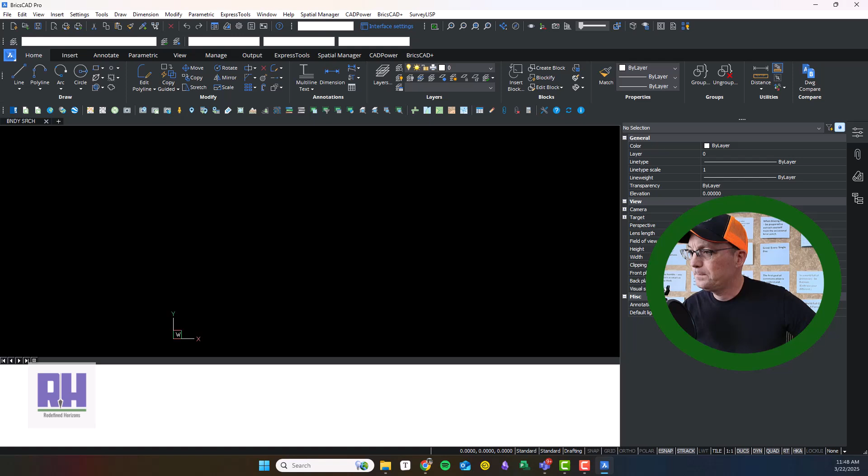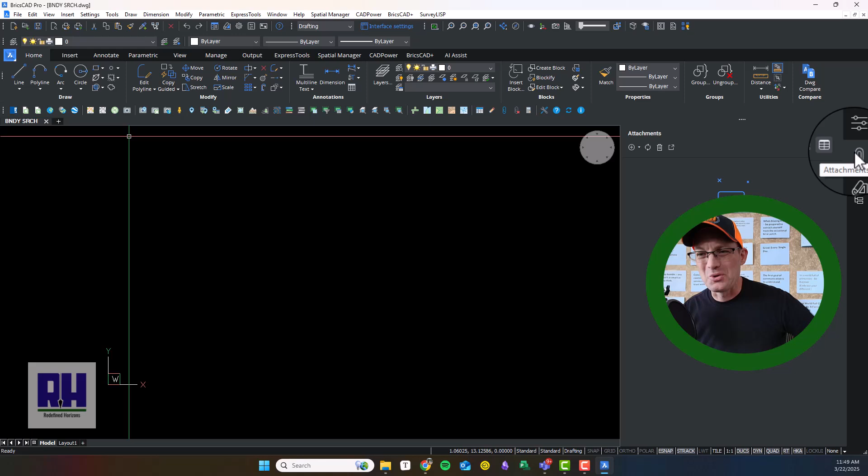I'm going to go ahead and open this drawing up in BricsCAD. The very first thing we're going to do is drop in our points. Okay, so we already have our points. I've imported the points in Carlson into what we call a points drawing. I have other videos on YouTube that show you guys how to do that. So we're gonna insert that drawing as an XREF here. We are on state plane and our boundary is going to be in grid, so we'll have to remember that. So let's go to our job here.

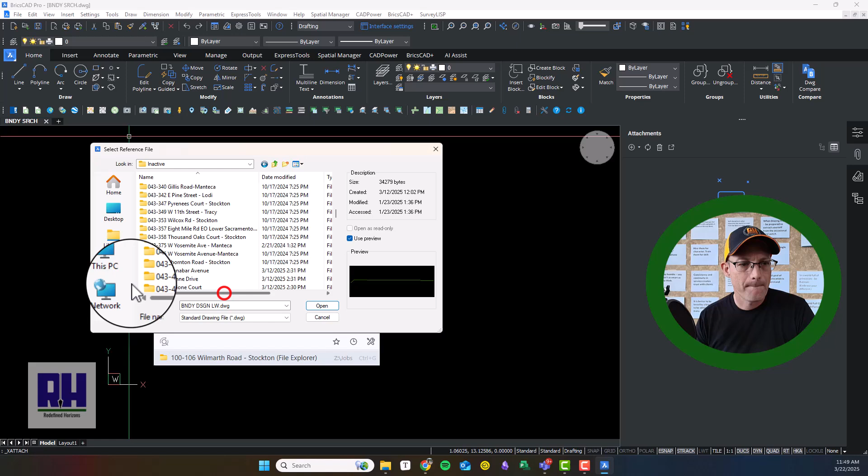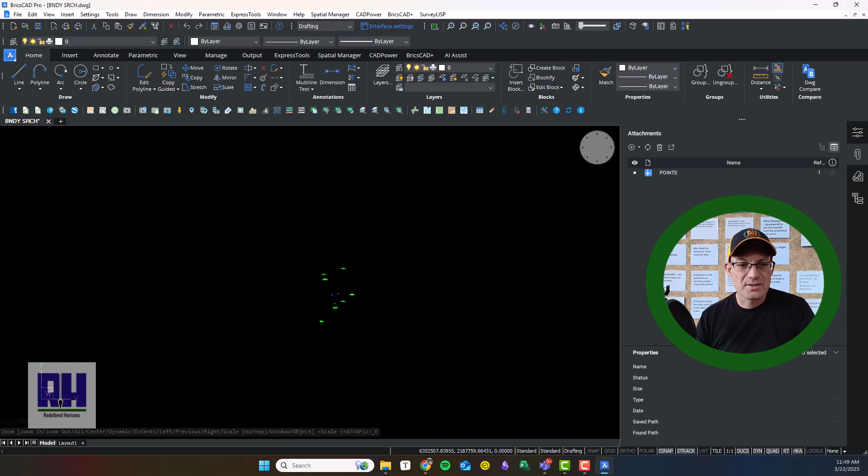This is Wilmarth Road. We keep our points drawing in our Carlson folder. So I'm going to open that and attach it at 0,0, scale factor 1. Okay, so now we've got our points. You see when I zoom out, I get these other points. Those are the CORS stations that I tied out. That's okay, I'll leave those in there for now. All right, so here's our 4 primary control points. And this is just a weird BricsCAD thing, but these are our found monuments.

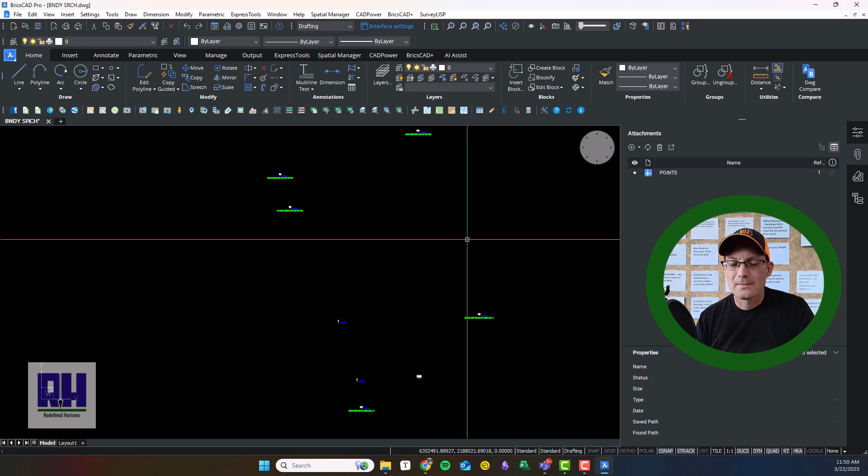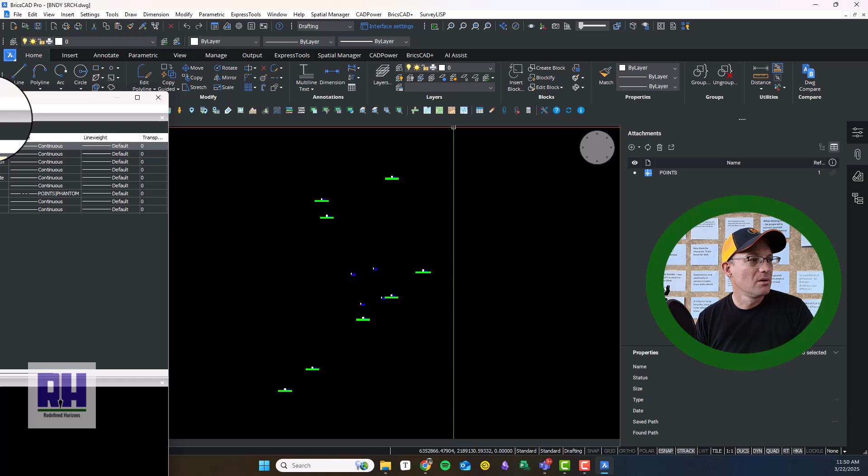It might help to have our GIS pulled up. It might be a little heavy with the screen recorder going and everything. We may need to get the GIS up. We'll see. Because we're going to start dropping some maps in here. I'm going to start with what I think is the most important map. We like to drop those in as blocks. And what I'm going to do is create a layer for each block. So we're going to make a new layer and it's going to be called blocks, plural.

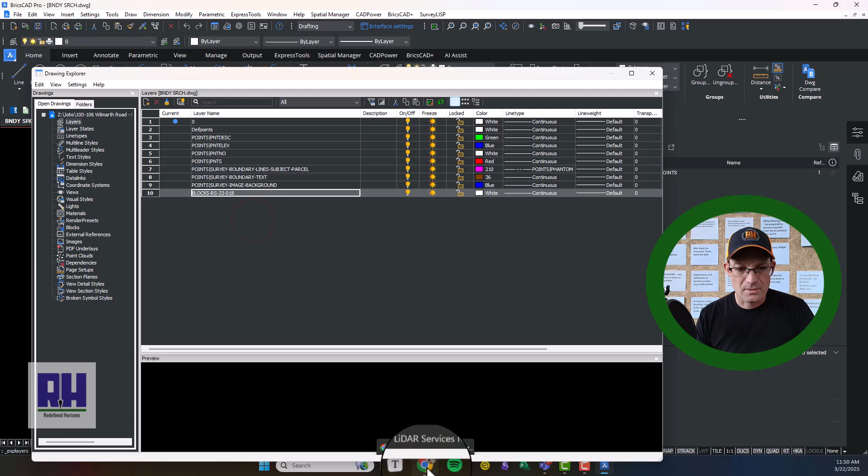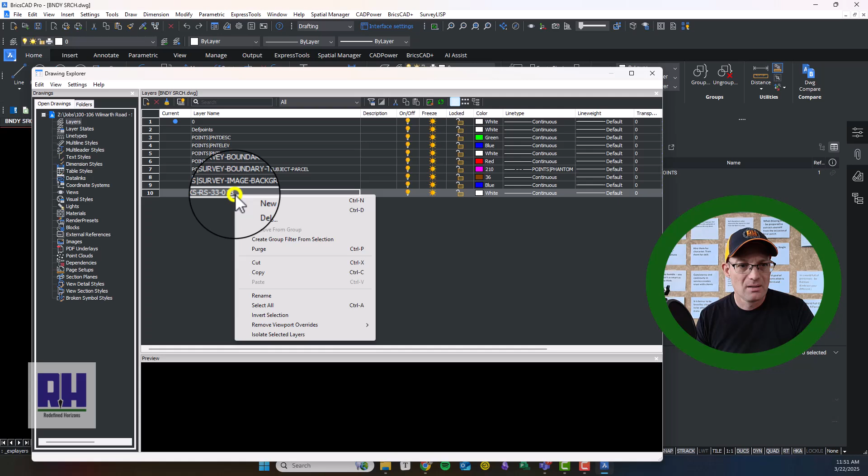This is RS, I think it's 33-018. So let's go look because I don't remember. We want to make sure that we name stuff properly. Oh, I'm in the wrong spot there. I apologize. All right, we got RS 33-016, and we have 32-18. That's our highway map. So let's make that 32, and we'll make a new one. Blocks RS 33-016. That's the most important map.

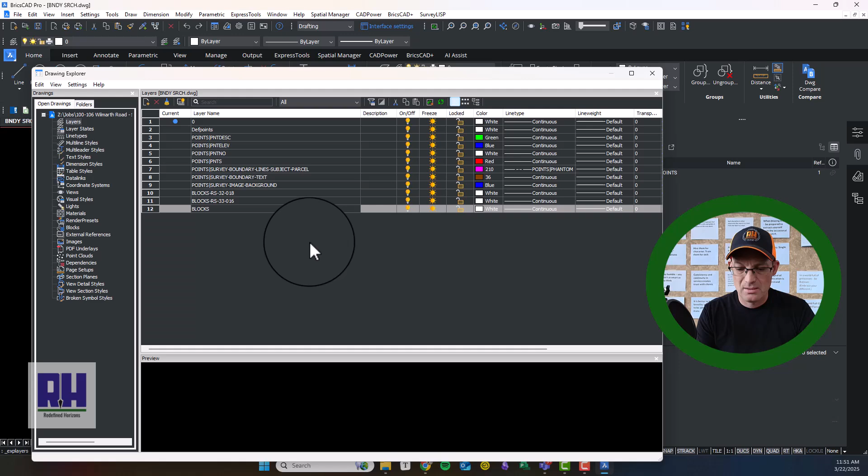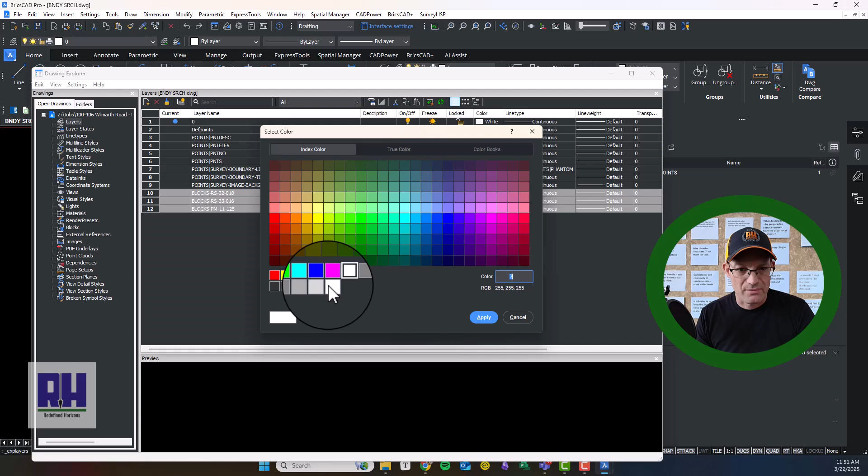And then we've got a parcel map, blocks PM 11125. And then we like to make all those block and XREF layers blue. Okay, so we got our layers. Let's make this layer the current layer. And then we'll insert that map as a block. So we're going to browse for our COGO folder. Make sure I'm in the right spot here. I'm not.

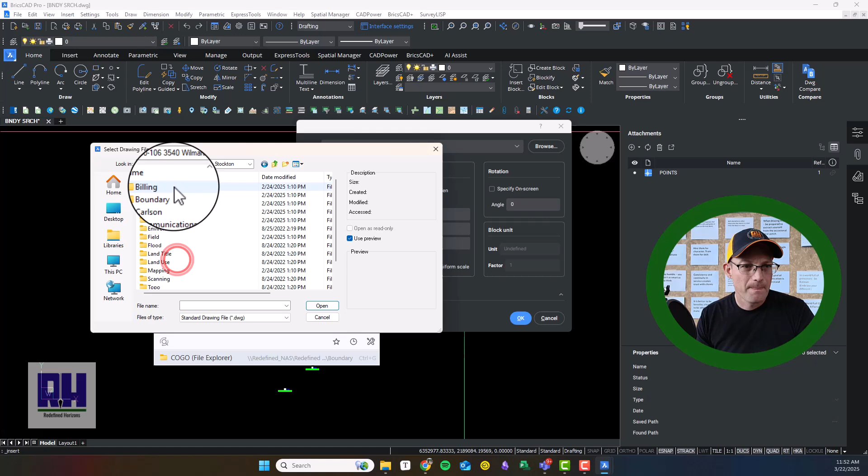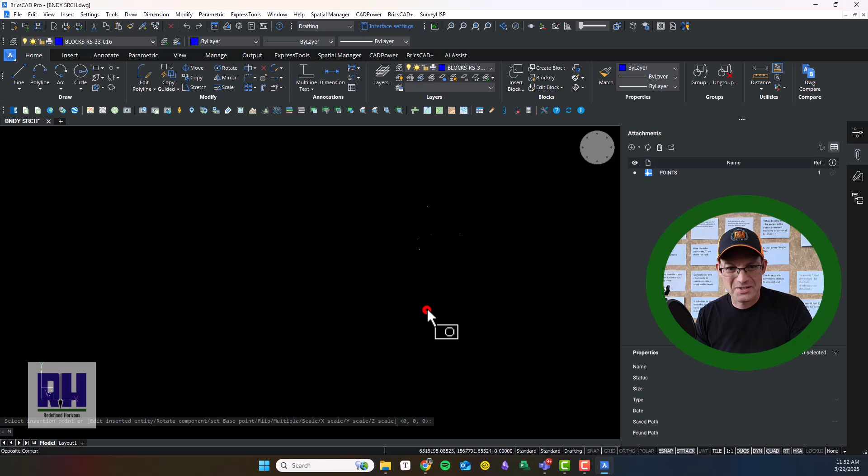And we just do this one map at a time, basically. So we're going to go into our boundary COGO folder. I am going to pick my map, and we're going to insert it. Okay, now sometimes you get this issue where it's off because it got COGOed in state plane. So I'm just gonna try and drop it kind of close there, and then we'll zoom in a little. All right. Okay, now we need to scale this.

Hopefully, yours truly did his job properly and exported a scale factor from the TBC project. Let's see if I did that. So we'll go into our field control, into our TBC project, export. What? Say it ain't so. We got a scale factor. All right, so I'm going to use point number 1 as my main point. So here's my scale factor to get to grid. I'm just going to minimize that for now. And so we're gonna scale this.

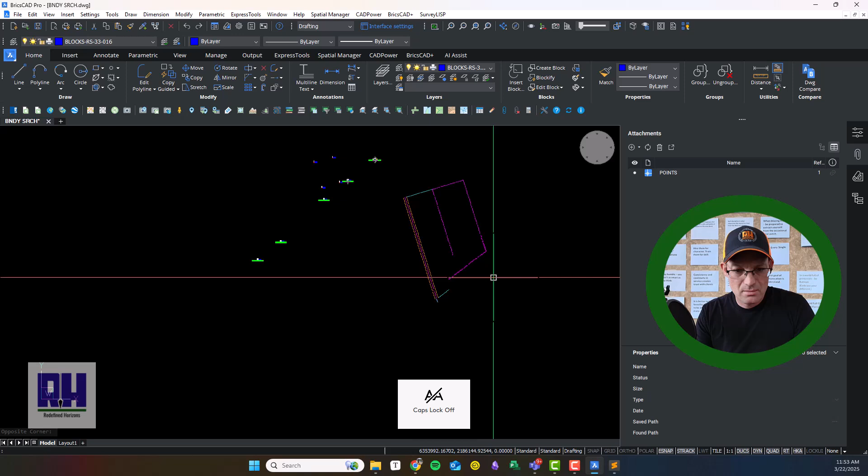We're just going to run the scale command. I'm sorry guys, I'm old school and I'm command line driven. It doesn't matter where we scale from. We're going to put in our reference factor. It didn't let me do that.

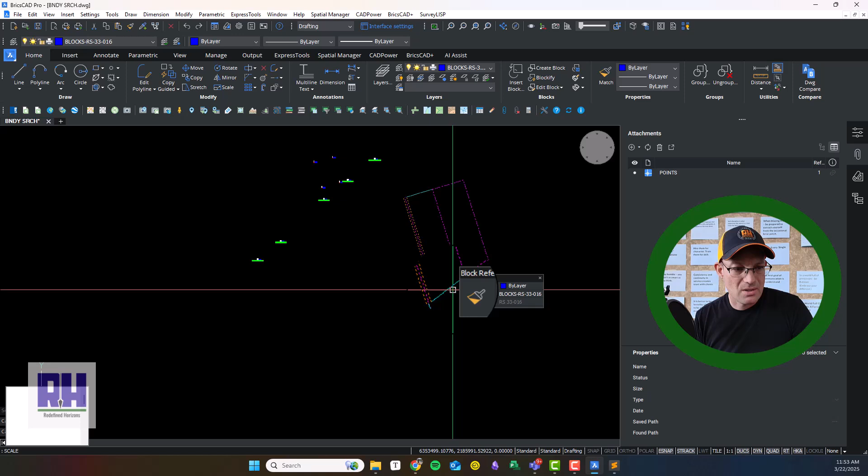Let's try again. Scale point. Will it only let me type it? I guess it only lets me type it. 412741.

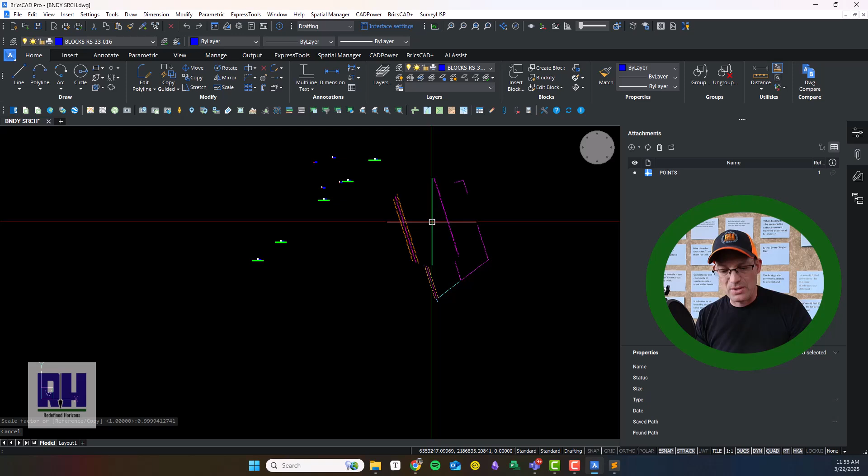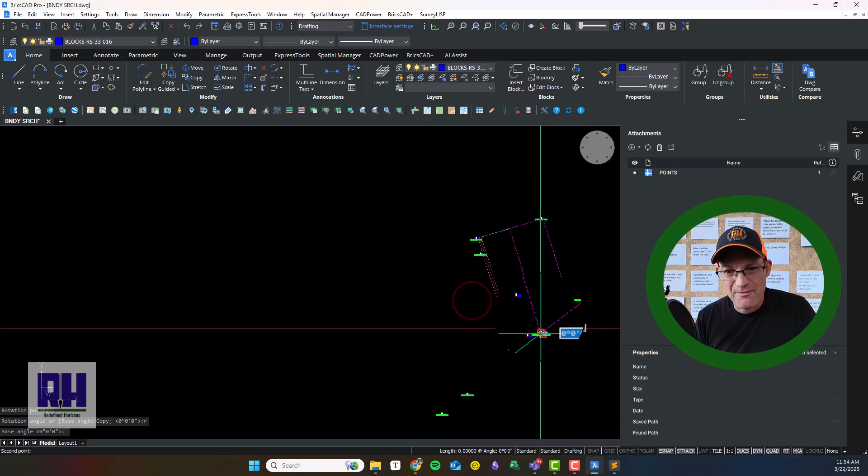All right, so we just scaled our map to grid. Now we're going to place it, and then we're going to fill out our insert record. I think I'm going to hold this monument down here. It was found on our property, so we're going to hold 500. And I want to try and get a rotation point that's as far away as I can, basically from 500. So I'm going to rotate at 500 with a reference, and I'm going to drop this point on.

Man, that fits really good. Let's just draw us a little line there. Go to our properties. So this is telling us how our record fits our measured.

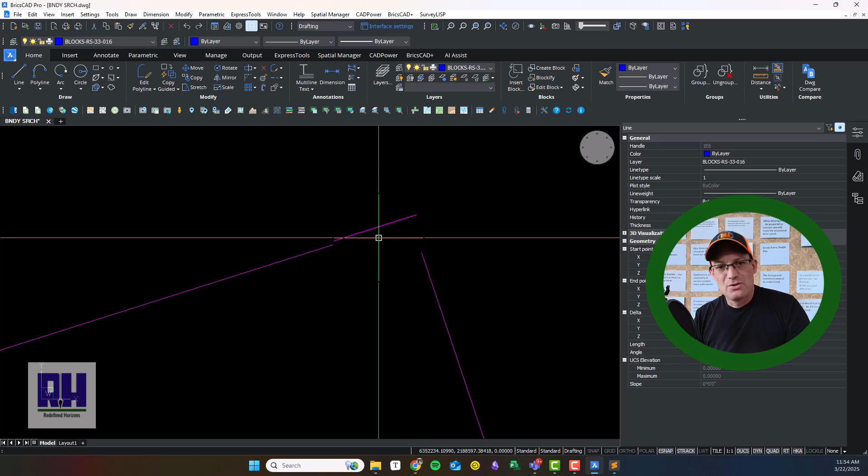You guys can see I'm just zeroing out these Z's. So that's a half a foot. That could be a little better, but not too bad.

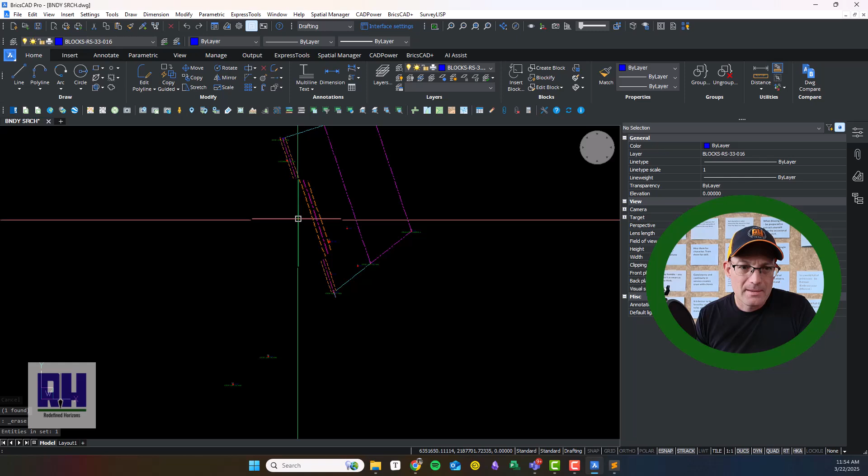Man, we freaking smoked this centerline monument. It's actually not a centerline monument, it's in a Monwell. So that looks pretty good. So 4/10. Yeah, you know, I might be kicking around to half a foot.

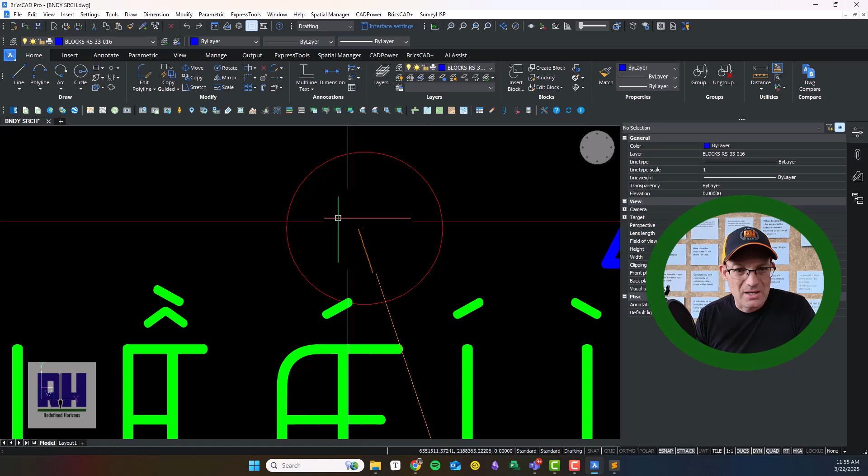Let's see, how do we hit this? This looks like it hits pretty good. So less than 2/10 there. So not bad, not bad.

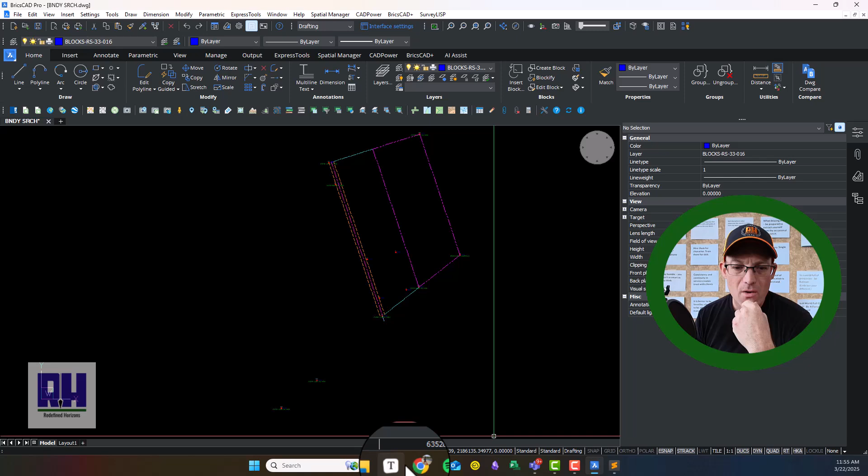Okay, so what we want to do now is update our insert record. So let's go ahead and open that up. Sorry guys, wrong folder, I apologize. Let's get our insert record up.

All right, so we'll input our job number here. This is 100-106, that's what we use for our pro bono work. 3540 Wilmarth Road, Stockton. And this is being completed by yours truly, Landon Blake.

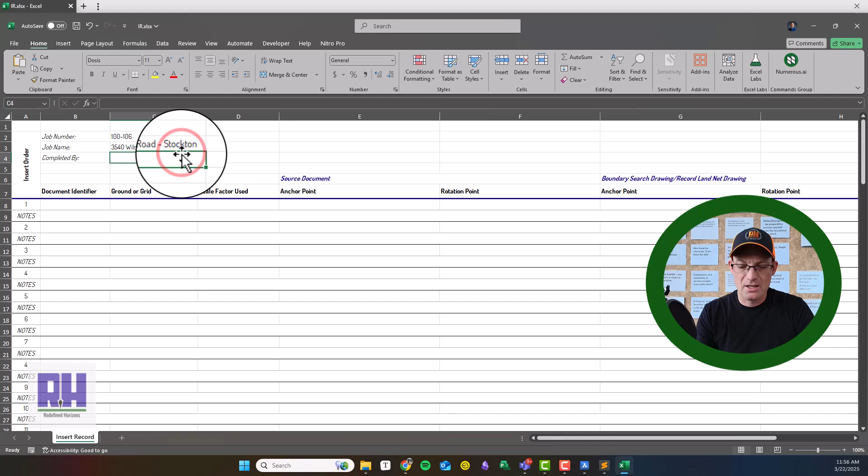Okay, so here's where we do our insert record. So our document identifier is RS33016. It is in ground, so it's in ground. The source document is in ground. We used a scale factor of 4 nines, 41274, 41274. Okay, our anchor point was RH number 500.

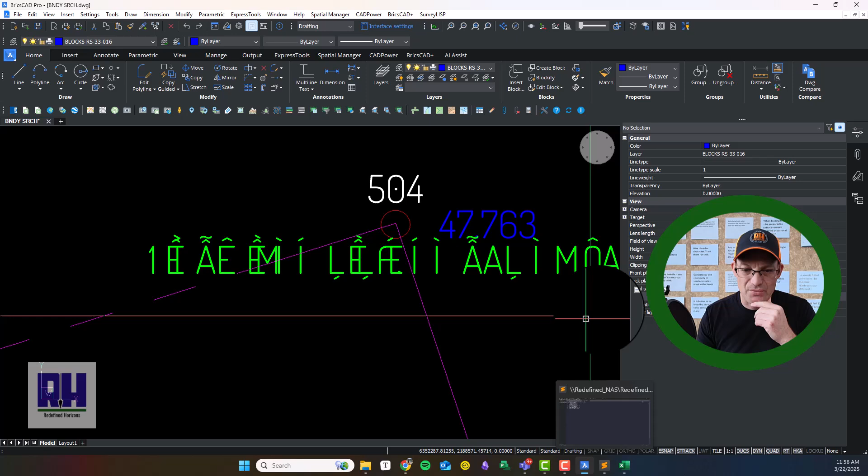Our rotation point was RH number, I don't remember. So part of the reason we do this, guys, is so we can retrace how we put together our boundary search drawings. So it was RH 504. Oh, I'm sorry, these two go over here.

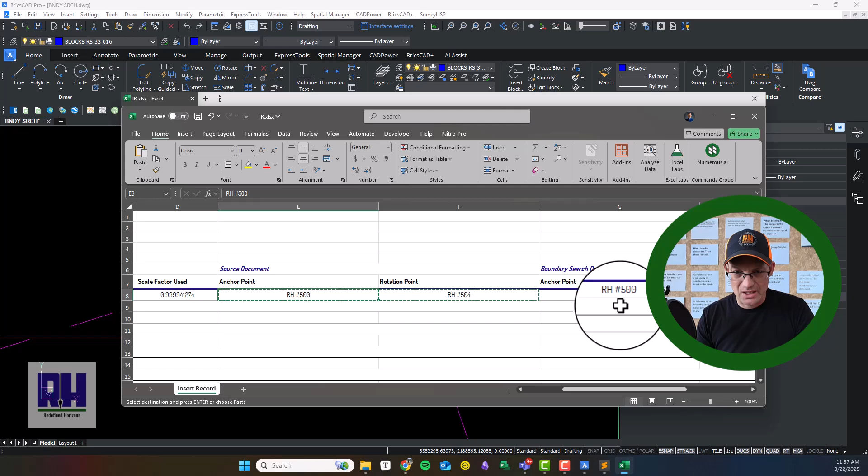Okay, so we have to describe what part of the source document we anchored to the point. So to do that, we need to actually look at the source document.

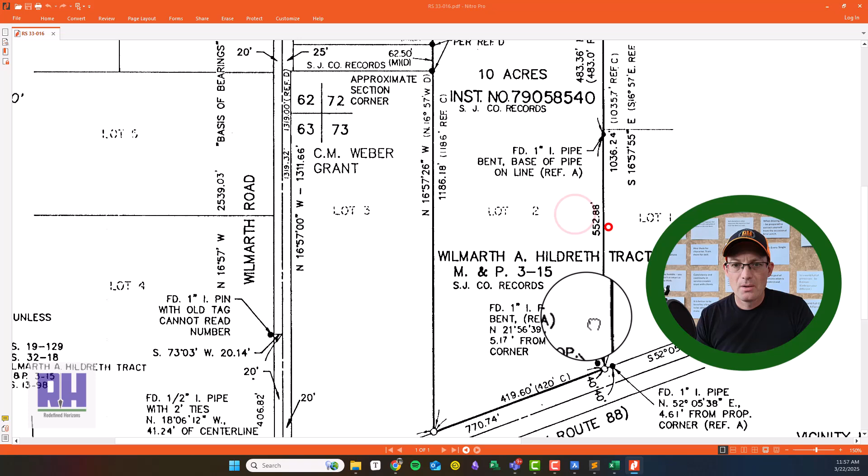You guys will see what I mean here in a minute. So we anchored — this is the subject parcel. So we anchored the southwest corner of the surveyed parcel, or subject parcel, and our rotation point was the northeast corner of the surveyed parcel.

Okay, and we don't need — I don't know why grantee's in here, that needs to get fixed in our template. All right, so we've got our insert record ready to go.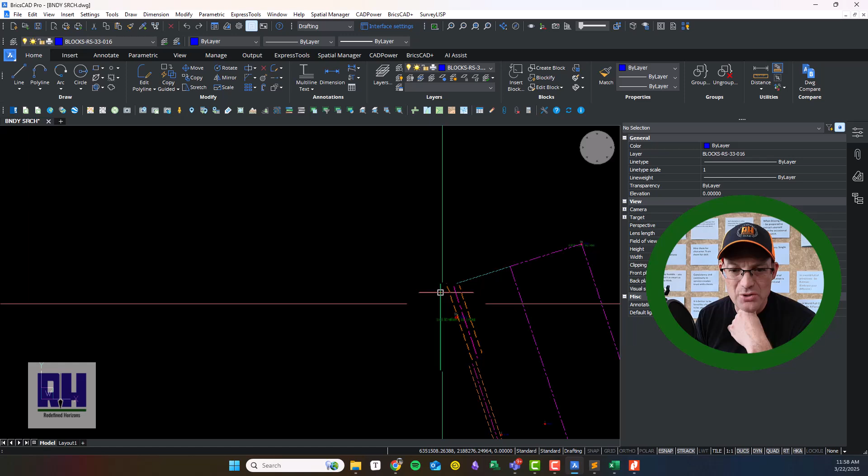What I'm going to do now is drop in — I'm not going to record it, but I'll drop in our other two maps. So we've got our parcel map to put in here, that's going to confirm the center line of Wilmarth, and then we'll get our highway map in here. I'm just checking for gaps and overlaps on that highway right of way.

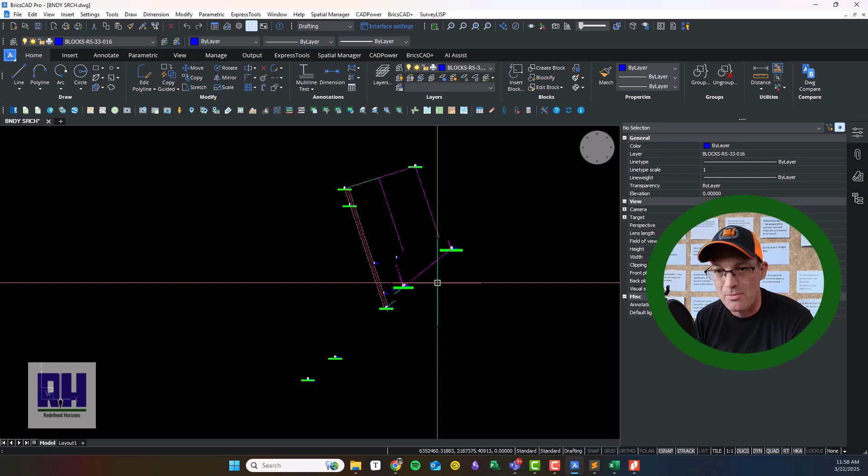And so I want you guys to understand, we don't really need those other two maps. We could build our boundary off of this, but they're adjacent maps, and I'm going to use them as a check to verify that we've got pretty good results. I suspect they're going to fit within a half a foot.

It seems like we're kicking around a few tenths of a foot here. So, all right, I'll get that done. Then we'll take a look in the next video. We'll find out how we actually get our deeded lines in here.